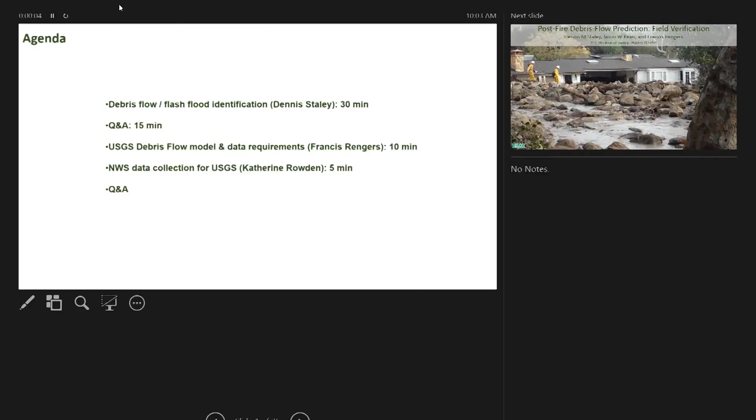Okay, so the purpose of my talk is I'm going to be just giving a brief overview of things that need to be looked at when you're trying to decipher whether or not there was a flash flood or a debris flow below or within a recently burned watershed. It's not a simple task to do. So I don't want anyone to be under the illusion that you're going to walk out of here and be able to figure this out the very first time you go out in the field.

It's one of those things that it's sort of a continuum between a flood and a debris flow. And the flow can actually evolve at the exact same location in time. So what may start out as a debris flow may become a flood and eradicate any evidence of the earlier debris flow. Or you could have a perfectly preserved debris flow that's really easy to identify. But that's a fairly rare occurrence.

So the idea here is just to kind of give you an idea of things that we look for in the field and some examples of what these things might look like, so that we can go forward and then think about verification and how we can use some help getting data and input into our models so we can make them better. And then Francis will give an overview of sort of what the data requirements are and how we might use those.

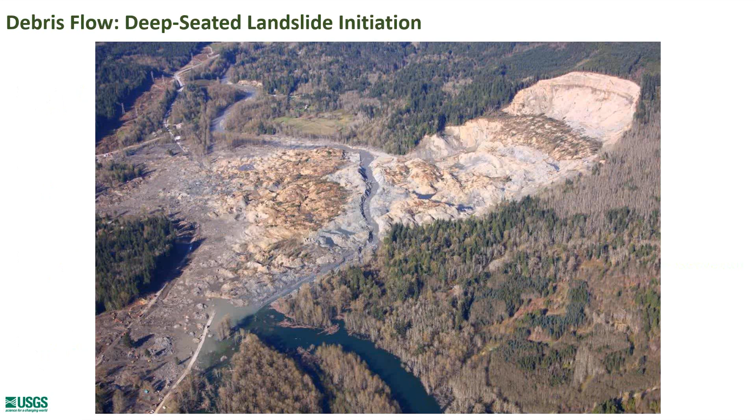So at sort of one end of the continuum of landslides and debris flows is maybe the Oso landslide from March of 2014. This is sort of a deep-seated failure where an entire hill slope gave way. That material that broke off from the hill slope flowed downhill and devastated the community that was at the toe of the slope, unfortunately resulting in 43 fatalities. So this is sort of one end of the continuum, and this is what people often think of when they think of landslides and debris flows: these big, giant, discrete failures that are tens of meters deep.

Sort of moving closer towards post-fire debris flows are shallow landslides, and shallow landslides that generate debris flows. So what happens here is you'll get prolonged rainfall over a period of a few days, perhaps. The amount of water within the soil column builds up over that storm period. Eventually, some critical threshold is reached, and the slope fails. Typically, these are 10 meters-ish wide or less by a handful of meters deep.

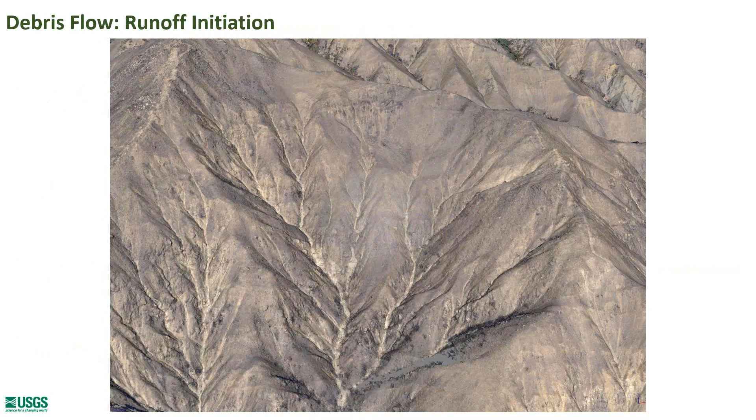Another view of what the channel system looked like above Montecito. Again, there are probably a couple shallow landslides you could pick out in there, but the primary triggering mechanism for those types of debris flows was that progressive sediment entrainment. So erosion and runoff, and then a coalescence of material as you move down slope.

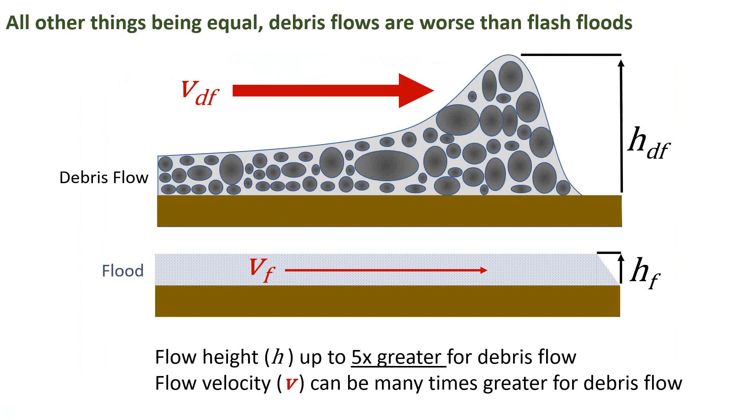So we're concerned about the debris flows and how they initiate because they're different in initiation than the floods are, but also the impact of these events is much different. So that's why in the Landslide Hazards program, we focus largely on debris flows. So the key points here for these last few slides are that flash floods and debris flows might look similar, but debris flows are more destructive.

There's a whole bunch of different flavors of debris flows, from those being generated by big, massive failures to the runoff-generated things that we see in recently burned areas. And those that occur in the burn areas are closest in relationship to the floods, just because of the very similar triggering mechanisms, but they're definitely a different animal than a flash flood.

And then finally, as we saw in the Waldo Canyon video, you can get floods and debris flows within the same event. So it may start off as a debris flow and evolve into a flood. It may start off as a flood and have periods of debris flow. So it's difficult to untangle those in a lot of instances, especially in burn areas.

But fortunately, the debris flows leave some fairly distinct features on the landscape that hopefully will be preserved after an event that we can go out and look and find in the field and say, oh, yes, this was a debris flow, or we don't see any evidence of debris flow, so it probably was just a flood event.

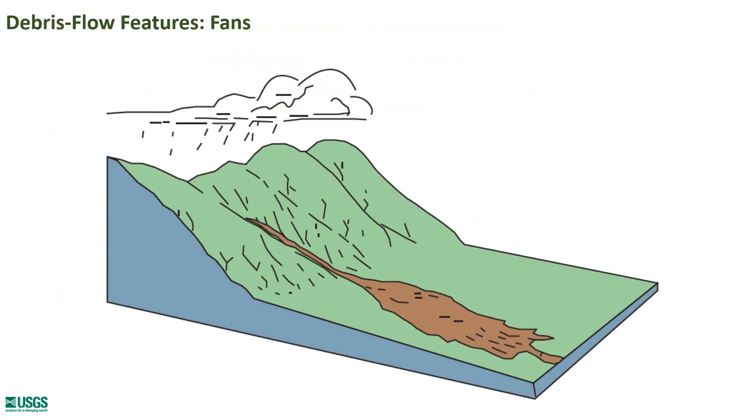And at the most basic level, floods and debris flows both produce fans. Alluvial fans develop over time with multiple flood or debris flow events. There's this aggradation of material at the base of the mountain front, which grows into a fan shape over time and with repeated events. Debris flow fans and fans that are made by floods have different morphometry. They have different shapes and features on them, but they both make these fan shapes. So we're not going to get too much into the broader scale fan morphometry today. Instead, we're going to zoom in a little bit more.

And with repeated fires, repeated intense storms, and repeated debris flows, these fans build up over a period of time. So you can go out even in places that haven't burned in a while and say, hey, there's fans here, and we probably should be concerned about flooding and debris flow in these locations because they have produced these types of events in the past.

Of course, Montecito is built almost entirely on a fan. So there was some advance notice that this type of event would be possible. There were flows in the 60s, 70s, and early mid-90s, floods and debris flows that impacted the town. If you were to walk around Montecito, there's a lot of places where you see really big boulders pretty far from the mountain front. And in some cases, you kind of have to wonder how they got there. And so the area of Montecito is built on a fan. Lots of communities in the western U.S. are built on fans.

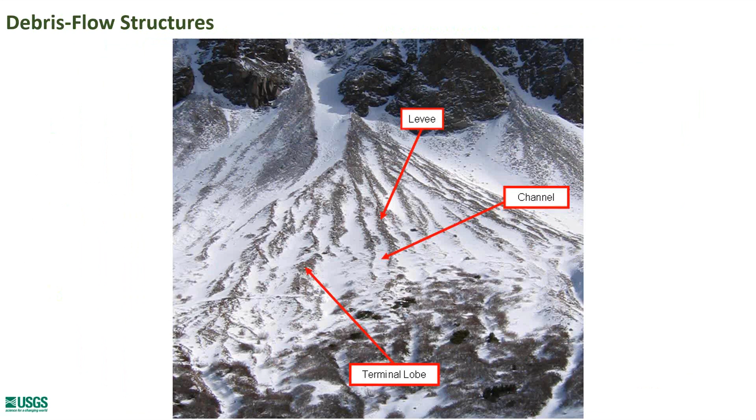So this is a pretty classic example of what you would see in a perfect world on a fan. Of course, we don't live in a perfect world, but a lot of times we do get perfect debris flows even in an imperfect world. And this is one I didn't go to, but Francis documented this one really well. This is in central Washington. It's sort of a mystery debris flow because the rainfall intensity is pretty low, but it was a debris flow generated by runoff. And there's a few distinct features you see.

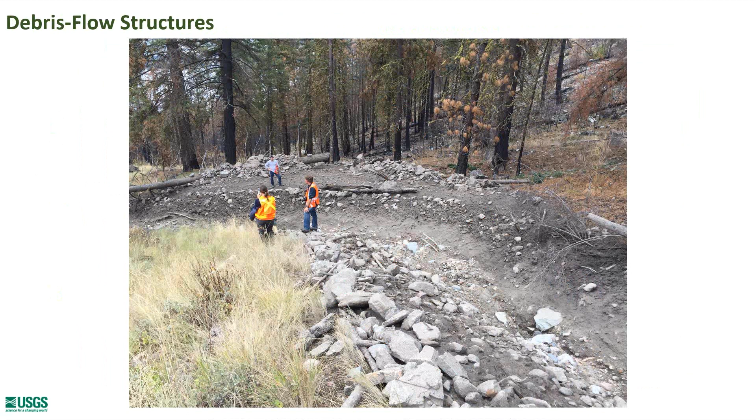You get your levees on the sides of the flow, the channel itself, where the material is pushed off to the side. And you get this nice U-shaped channel that forms from a nice debris flow. So this is a pretty classic example of what you would see in a debris flow channel in a recently burned area. Typically, they're not quite this nice, though, but this is a really, really good example.

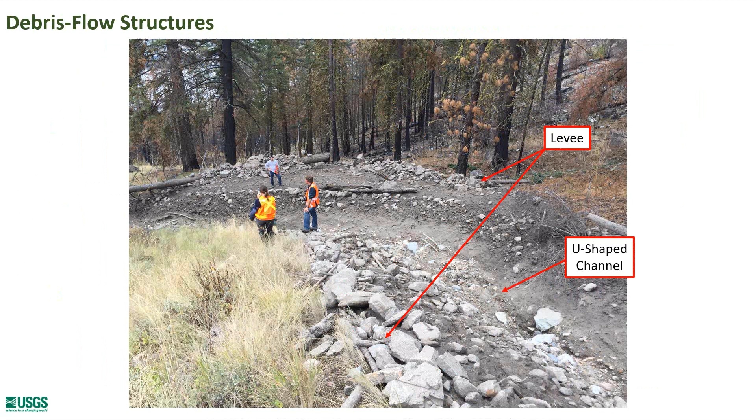If you go further down in the watershed, you might get some really nice levees that are formed on the side of the channel. So again, you get this pile of boulders. If you look off to the upper right-hand corner of the image, you can see that's where the stream channel was. So a big debris flow came through here, deposited all these materials, and these are pretty easy to see in the field. And again, another very, very classic example of what a levee might look like.

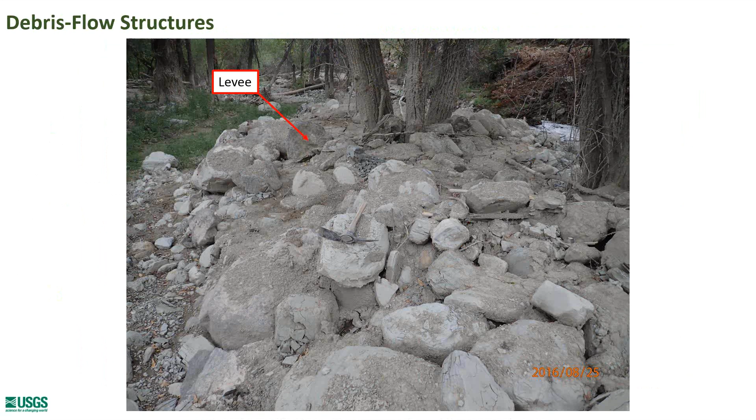There's a pickaxe for scale, so we're looking at boulders, maybe a meter or so in diameter. So a good size event, definitely hazardous. Again, we'll take a look at another channel that's been impacted by a debris flow. We've got a nice U-shaped channel. We've got our levees that have formed with a hat for scale, so maybe 25 centimeters or so, or a foot or two. Boulders of rocks a foot or two in diameter. But pretty classic, well-preserved evidence of a debris flow.

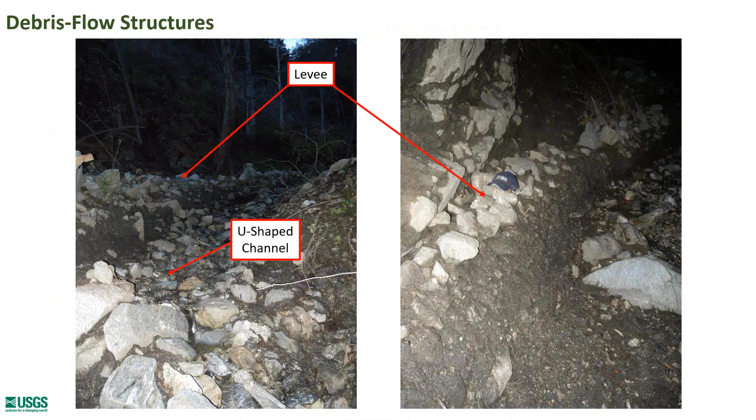So if we think about these features and structures, the debris flows imprint a distinct signature upon the landscape at a variety of spatial scales. So everything from a big fan all the way down to the smaller scale features such as levees, lobes, and U-shaped channels. We can look at things from the air and satellite and identify fans and oftentimes identify these features. So bigger levees will pop out sometimes in aerial photography or LiDAR data. But the fans certainly are something we can see in the field and identify.

We can see in the imagery and be able to say, hey, this is a hazardous place that we need to be concerned about. And it also can guide us, during verification efforts, to find places to go look for debris flows or floods. It's a good idea to look for places that have already produced these types of events in the past.

But as we'll see in the next couple slides, aerial photography, LiDAR, and remote sensing are great, but nothing beats boots on the ground for identifying debris flow features. Oftentimes the debris flow flows downstream out of the burned area, and so you won't be able to see that in aerial photography. The LiDAR may not be of sufficient quality to really be able to see some of these smaller features that are imprinted upon the landscape.

So we really rely upon getting out into the field and making observations and taking pictures and collecting GPS locations of where you're making your observation, because that really truly is the best way to figure out if it was a debris flow or not.

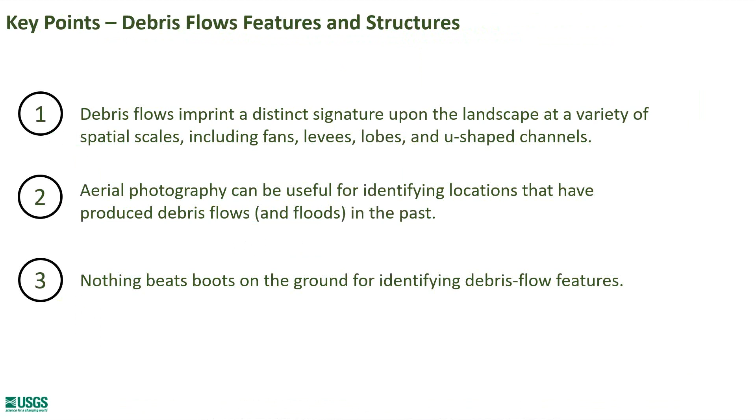So now that we've established that it's best to get out in the field, once you're out in the field, there's a few things you need to look for. And this is where we're going to jump into the science weeds for a little bit here, but I'm going to try to keep it as simple as possible. So there's sort of three basic things that you want to look for when you're looking at deposits and trying to figure out if they're a flood or a debris flow.

The first is the degree of sorting. And that just basically describes the distribution of grain sizes. So if you have a whole bunch of different grain sizes all mixed up, so you have big boulders and tiny little pebbles and mud all mixed up, you would consider that unsorted. If you have a whole bunch of rocks that are about the same size, pebbles or cobbles, then that's going to be well sorted if they're pretty much all the same size.

So that's sorting. I'll have some pictures highlighting these as well, but I just want to get you familiar with the terminology. The second is stratification. This describes the layered appearance of different grain sizes. So if they're layered, they're stratified. If there's no layering, they're unstratified.

And then finally, you want to look at how rocks are kind of related to one another and what's in between them. So if you pick up a rock, you look and see, is it another rock underneath, or is there mud in between the rocks? If it's supported by a rock, that's clast supported. If it's supported by mud mixed in between the other rocks, well, that's matrix supported. And so matrix support is a pretty clear indication of a debris flow and not a flood.

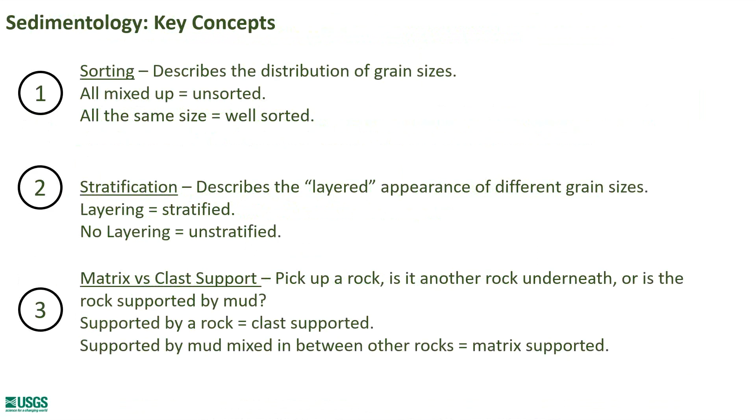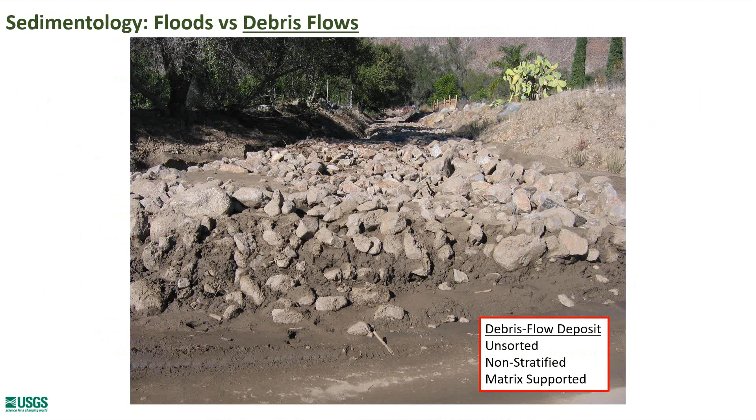So this is a pretty clear picture and a pretty textbook example of a debris flow deposit. It's unsorted, it's non-stratified, and it's matrix supported. We've got an example from Washington. This time Jeff Coe and Francis trenched a fan in central Washington and found historic debris flows.

A lot of times it's not quite as easy as that, and you've got to find really small examples of what happened in the past, because the watery flood flow at the end of the event may have eradicated the evidence of what happened at the beginning. So sometimes you got to look around corners and look in protected areas.

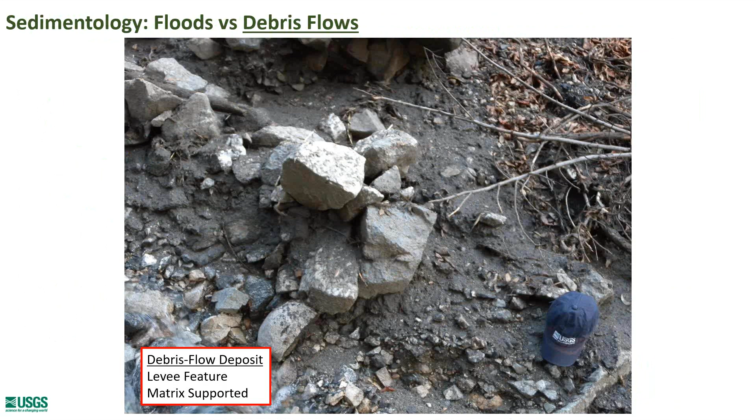Getting over towards flood deposits, they look quite a bit different. And so you can make these determinations in the field, but you have to make a lot of observations for the same location to really be able to figure it out.

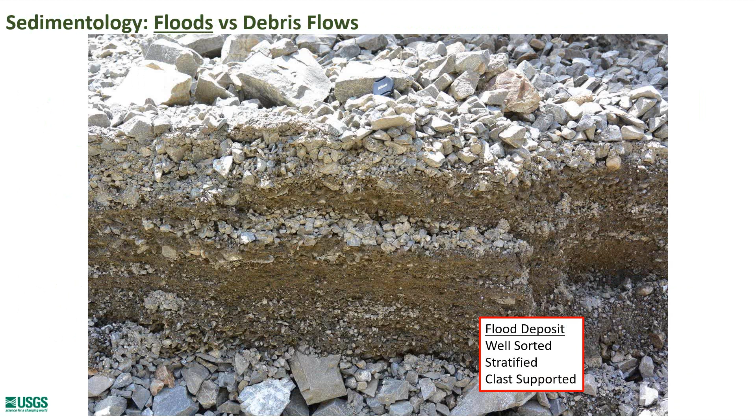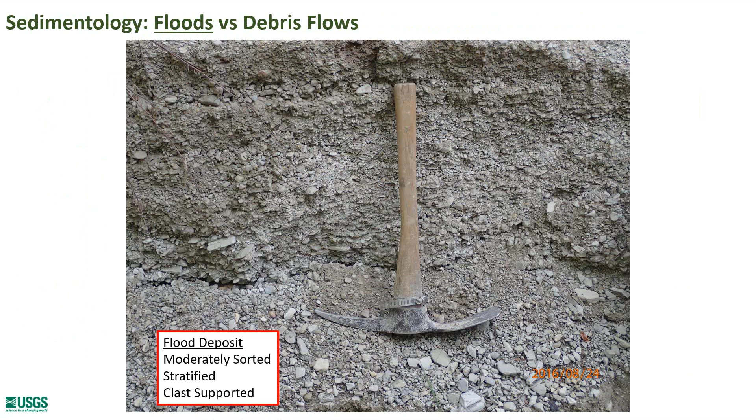So the key points here is that debris flow deposits tend to be unsorted, unstratified, matrix supported, and then I didn't get into massive and imbricated because we didn't have time. Flood deposits tend to be sorted, stratified, and clast supported. And again, it's really best to get out on the ground and try to figure out what's going on if it was a flood or a debris flow, because it's really hard to do from pictures alone.

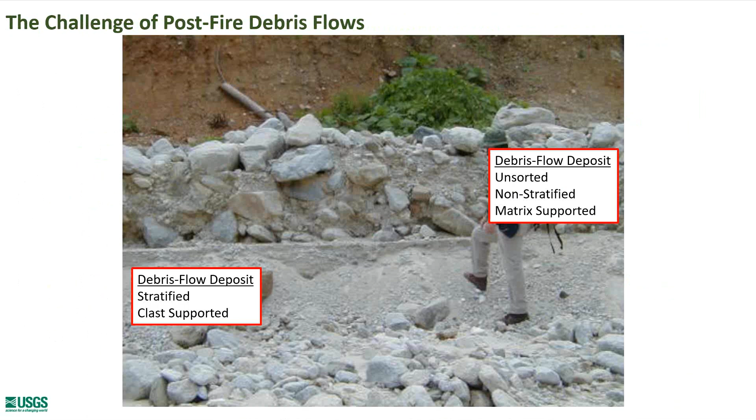So the challenge of doing this, though, is that oftentimes you'll have floods and debris flows occurring at the same location or even within the same event. So here you have a nice perfect debris flow deposit on top of a perfect flood deposit. And I think this was in the same event. So in the same location, in the same event, you can have both floods and debris flows. So at the top is our debris flow deposit. Oh, sorry, I should say flood deposit at the bottom.

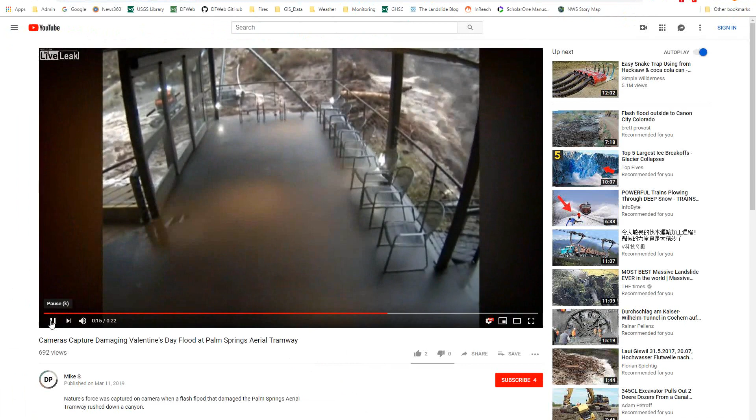So another challenge is that the videos might be a bit ambiguous. So if we go to our Palm Springs video, I think most of you have probably seen this from just a couple weeks ago. My initial hunch is that this was a debris flow, but from the video evidence itself, you can't really make that determination. If we got out in the field, I would assume that we would see some evidence of boulder levees or other features, deposits that are clearly debris flow, but we just can't make that determination from the video alone. We really need to get out in the field and see what that thing looked like.

So just wrapping up, debris flows and floods can occur within the same flow event. The recessional flood flow can eradicate evidence of an earlier debris flow. And finally, once again, nothing beats boots on the ground for identifying the differences between debris flow and flood deposits.